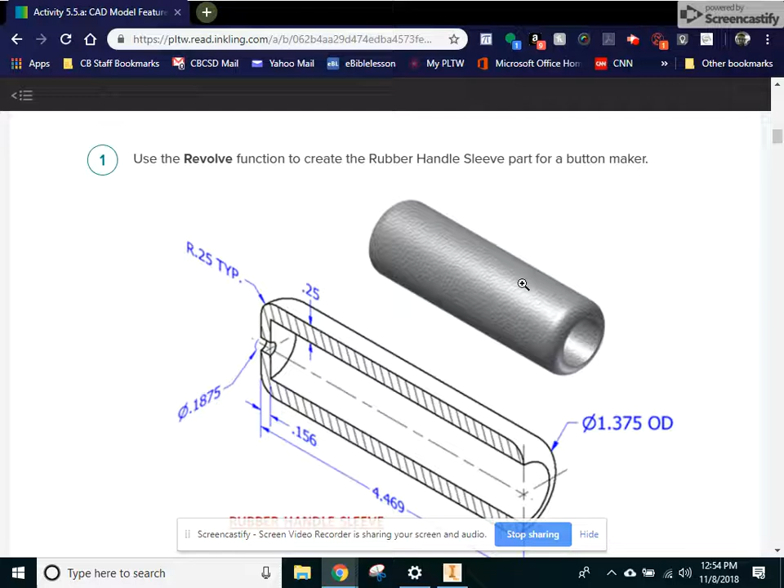Okay, so what we're going to be learning today is a new tool, and it's the revolve tool. It's a 3D tool. So what it does is it takes one profile, just like you would extrude it, but instead of extruding it, we're going to rotate that profile around a certain axis, and that creates a round profile.

So, select our new sketch. And what we're going to draw is this L-shaped thing. It's a long, skinny L-shaped thing. We're going to draw it, and it's going to be a little bit off the x-axis. That is the diameter, so we're going to use the radius of that, half that, to determine how high it goes, but we'll put those dimensions in here in a second.

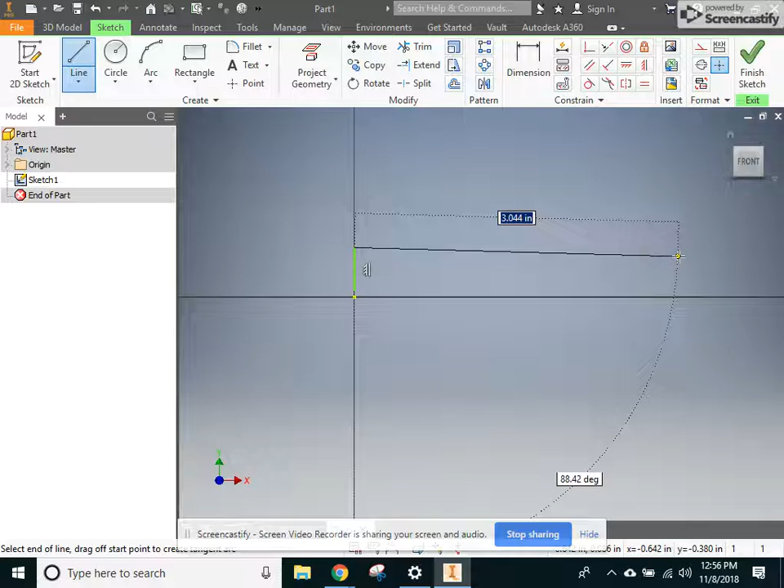But I like to start with the line tool, and I don't start right on the origin, I just start right above the origin for this one, because we know we've got a gap in there. I'm going to go up a little ways, and I'm going to zoom out because we need to go down here quite a ways. What's the length of that thing? 4.469. I can go in and type that in. 4.469.

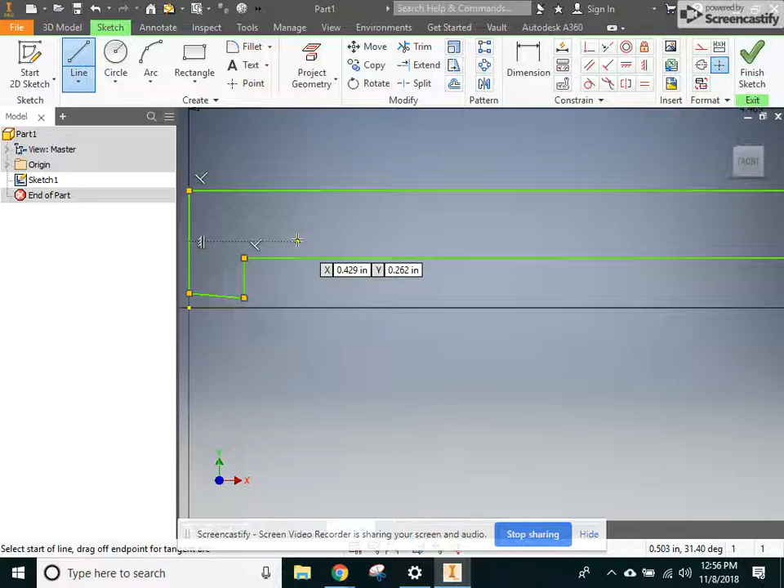I didn't say how tall it was yet. We're going to do that one later. I just eyeballed it. All right, I'm going to come down here. Come down here. Oops. Did not mean to make that crooked like that, but I can fix that real quick. A little horizontal constraint. Boop.

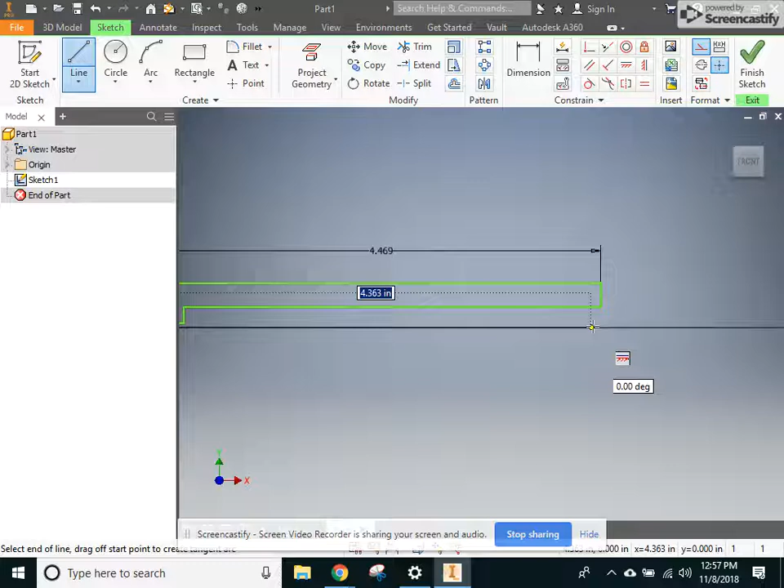Okay. Now we need to add our dimensions in. And we also are going to need a construction line down here to act as our axis. Okay. So you make a line. Maybe turn on construction with this button right there. And then you can draw a line that represents the axis. Doesn't really matter how long that line is. But now it's a dotted line because it's a construction line. And we can also use that now to base some dimensions.

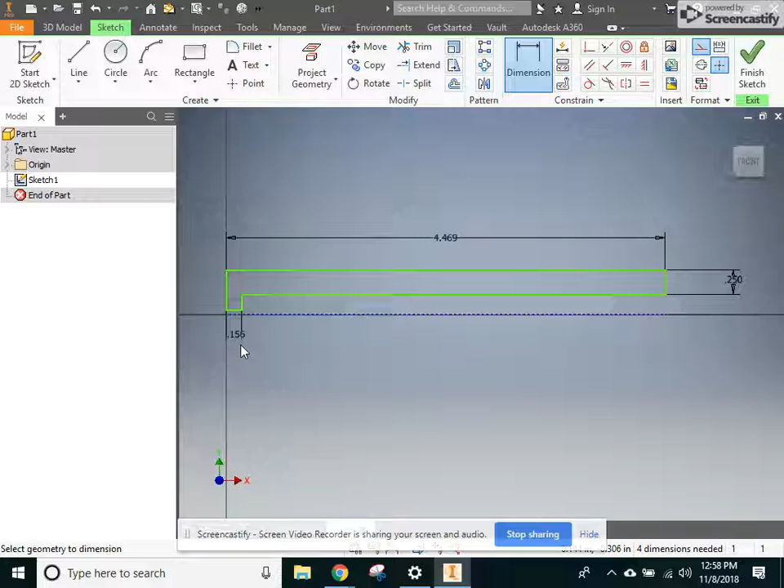So one dimension we know here is this 0.25. That's an easy one to do here, right? 0.25 is the distance between those two lines. 0.25. Okay. Then we have 0.156 is the distance over here, so this is a little skinnier. This distance here. And we already put in the 4.469. If you didn't, go ahead and do that.

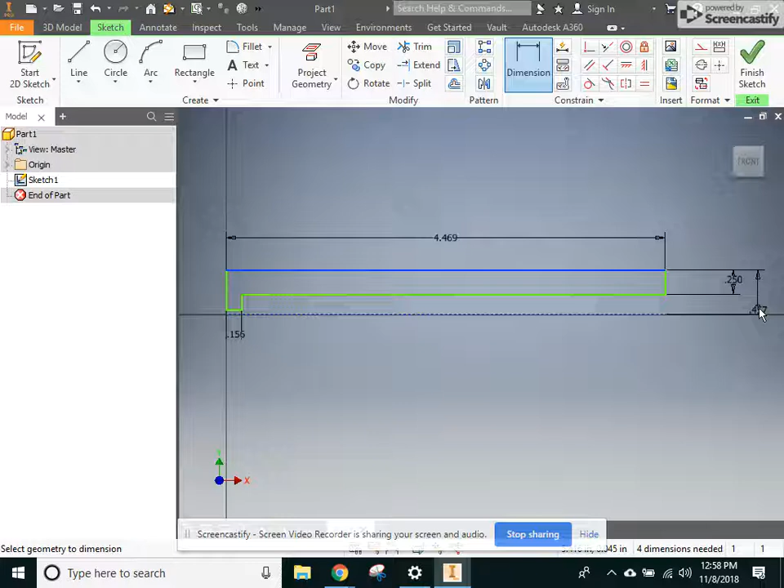Now these other two dimensions, this right here, OD, stands for outside diameter. So the outside diameter of this entire handle sleeve is 1.375. Now we want only the radius because we're only measuring half of it. So anytime we see a diameter, we need to cut that in half and make a radius out of it. So the 1.375 is dimension from this outside line to that axis. We're going to cut that in half. 1.375 divided by 2.

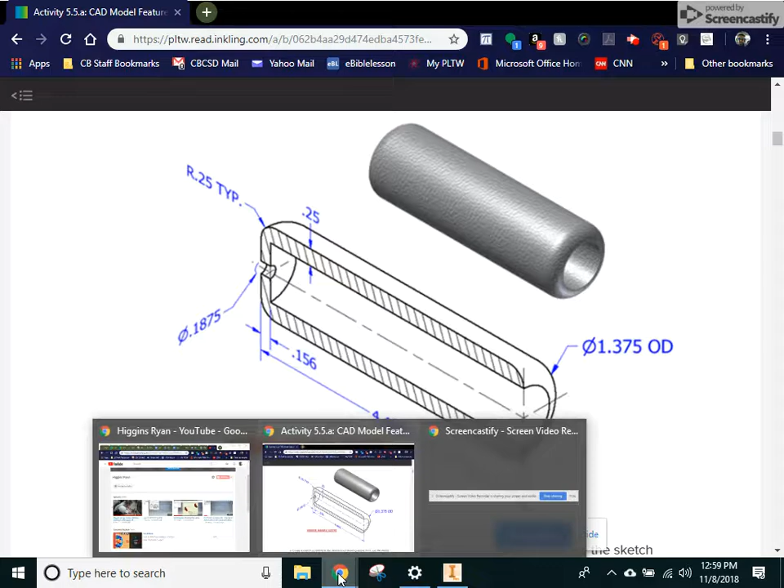All right. Well, there's another diameter in here. This 0.1875. That's the diameter of this little hole on the end. There's a little weep hole on the end so that when you put the sleeve on, air can escape and you can fit it all the way down onto the end. So 0.1875 is to be the distance from the axis to this little edge. Of course, we have to divide that number by 2. What was that number again? 0.1875. So 0.1875 divided by 2.

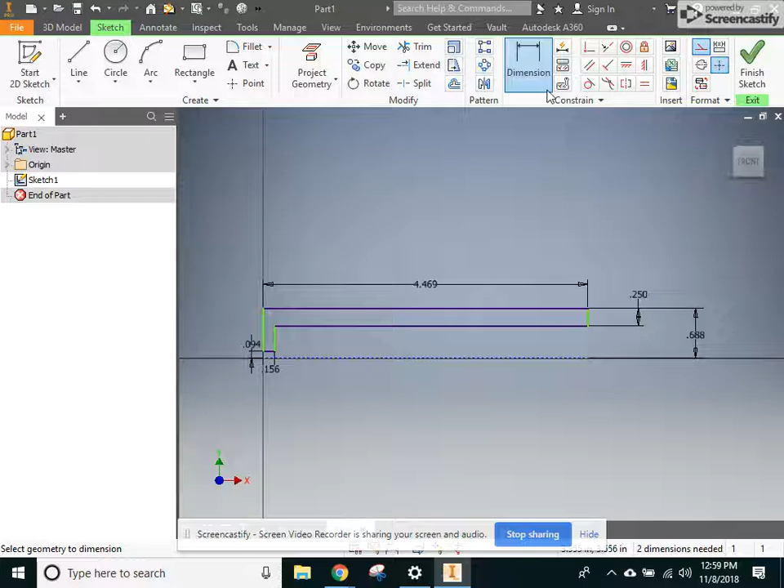All right. Now I'm missing these green lines here. So Inventor wants to know where this should be located, left or right. So what I normally do here is I'll make a vertical constraint between the origin and the corner right above it. So if I click there and there, it locks all those lines in as purple, and I'm fully constrained. It says 1 dimension needed down here. It's just because we don't have the dimension on this construction line. We don't need it. But as long as they're all purple, we're cool.

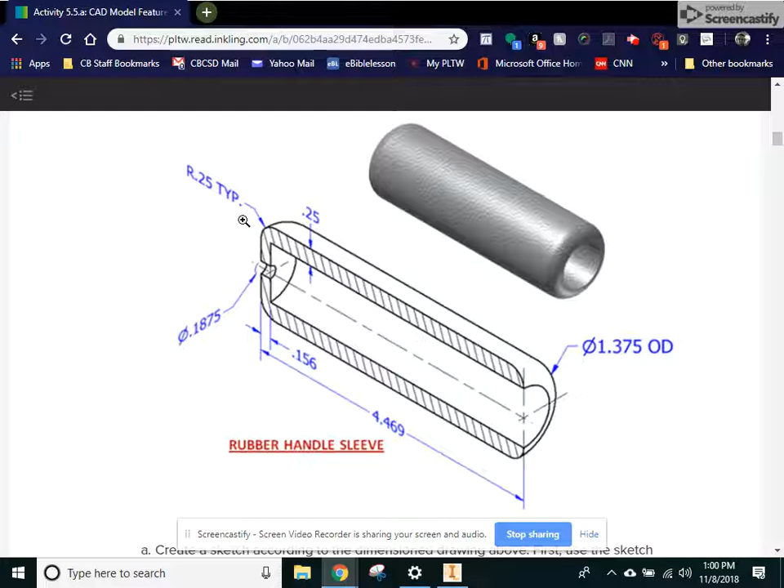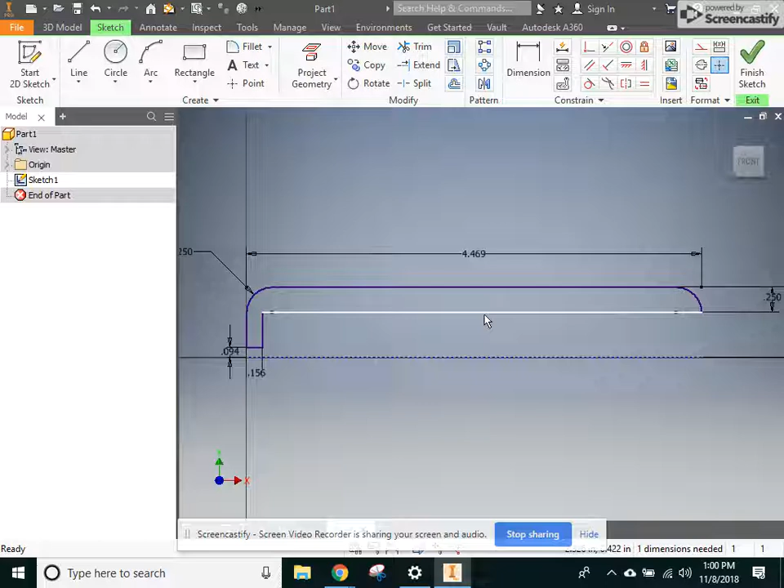However, now we've got a couple of fillets. It says a radius of 0.25 TYP. The TYP stands for typical, which means they're all that way. That means all the fillets are going to be 0.25. So we're going to go fillet, 0.25 radius. Oh, got to turn off construction. Forgot to turn off construction, so I'm going to right click on that and uncheck the construction box. Okay, so now I've got my profile all good. It's all purple lines, got the fillets on there, everything looks good. I'm ready to finish this sketch.

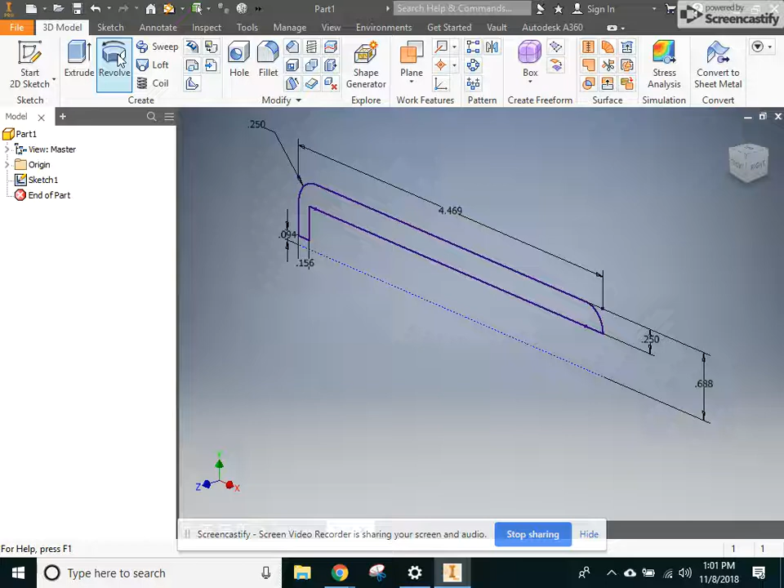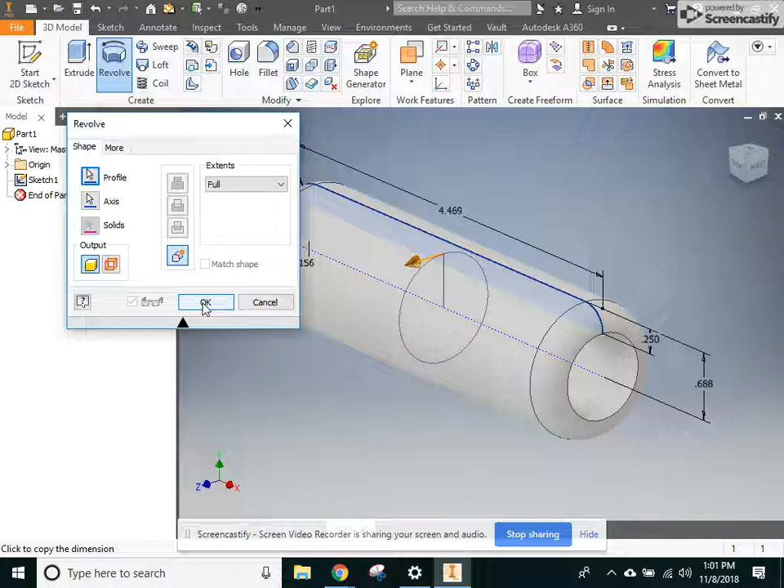So I finished the sketch, and now instead of extrude, I'm going to use revolve. So in the revolve window, it's already selected the profile. It assumed that's the profile I wanted, and it's ready for me to select an axis. The axis is that line down here that we drew, the construction line. And boom, look at that. That's pretty. I hit OK, and there you have it, the rubber handle sleeve.